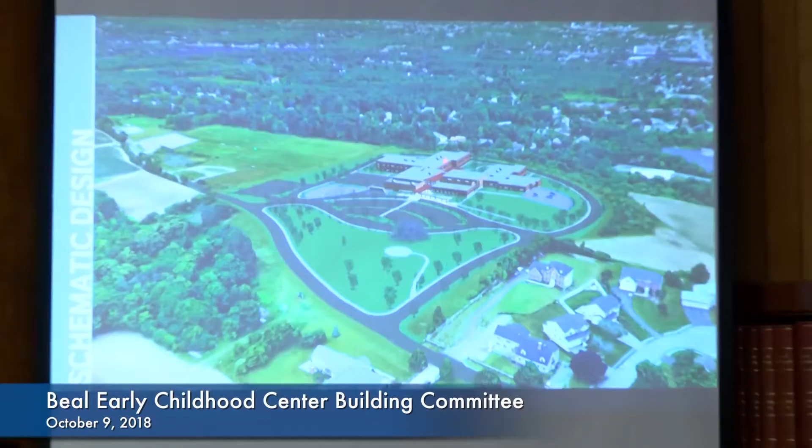This was the bird's-eye view that's been on some of the boards we presented to the town to use in recent events. It's been used for campaigning.

As you recall, the core spaces are located in the front here and the academic wings out either side. The K classrooms are clustered in this area with a playground outside, and then we have the paved play area, another playground area, and the front parking lot.

Just a few other things, in case you forgot: parent pickup comes around the building through the paved play area and back, and buses come in and circulate around the parking lot through this loop and underneath this canopy.

As we mentioned before, we were looking at masonry and a mix of some metal panel cladding. We're still looking at similar materials. We definitely want to stay with classic colors. We're looking closely at earth tones and introductions of some opportunities for brighter colors, but still subtle in nature, so that they'll stand the test of time.

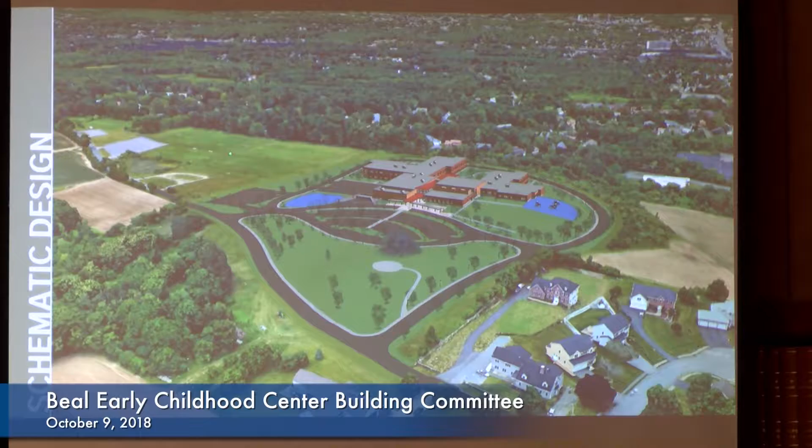So what we did to really give you a good sense is, rather than giving you still images, we actually took this building information model, brought it into a virtual reality environment, and recorded a video clip for you guys to review today. I'm going to try to narrate over it. If you could hold your questions to the end, I can go back and pause part of it if you really want to get into it, but that's what's going to start here.

So for those of you, it's the existing site, and there's going to be a 3D spin around. Here, what we're looking at as far as materials go, you can see the cafeteria in the reddish color, the stair towers clad in a greener color, and then the rest of the building, the academic wings, is masonry. We're looking at different masonry patterns.

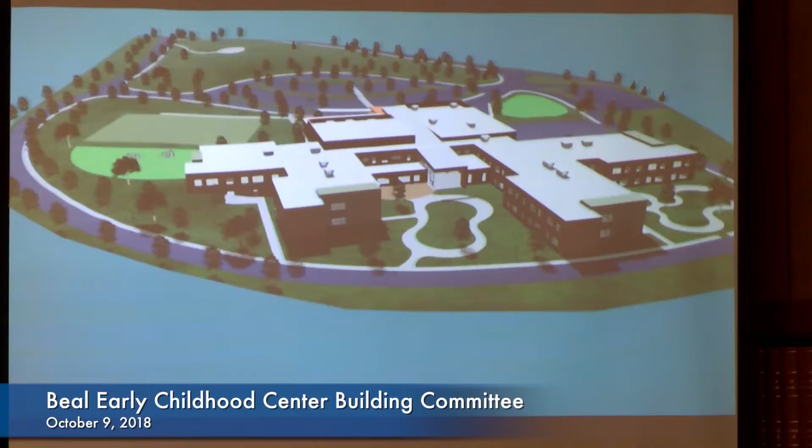We want the elevations to have some life to them. We don't want it to come off as overly institutional. This is a school that is being designed for young children.

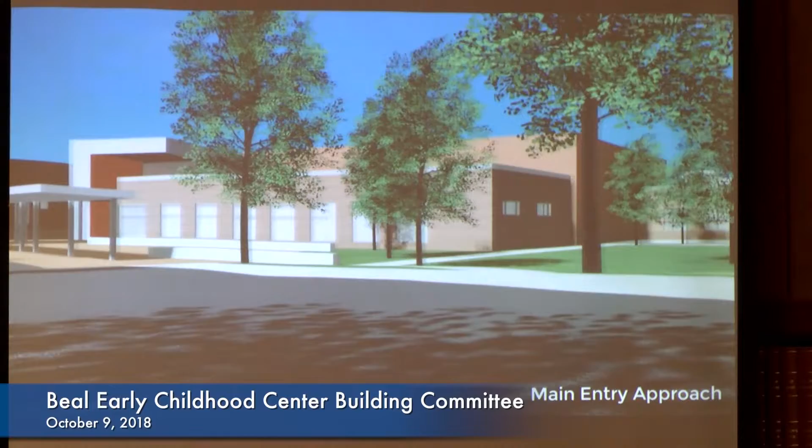This is the approach. You can see the canopies there for the students to get dropped off the bus. The larger lobby element was popping up to draw your attention, but you can see the slate patterning on that K academic wing that was just there to the right.

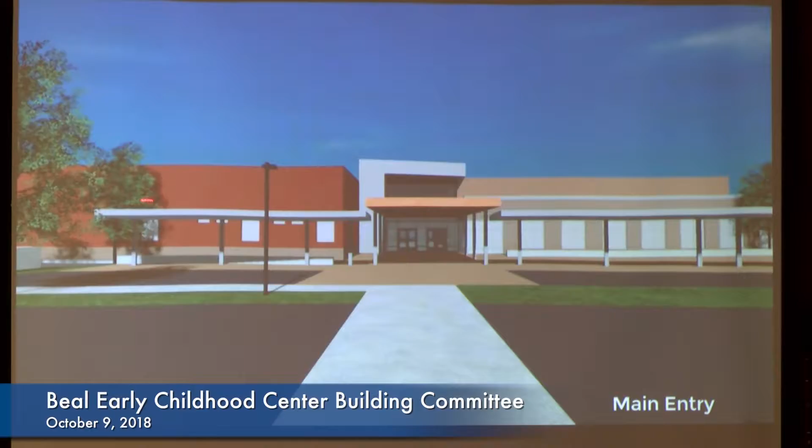Here, looking at the main entry again, you have the administration right here. We have this larger element we've introduced to help draw your attention for wayfinding to the main entrance, and then this is the kitchen end of the cafeteria.

This is the courtyard gardens, where those community garden beds that are already currently at Beal will be housed on the new site. So this is where students will have their own grade-level classroom gardens, with the academic wings kind of embracing them, and the stair tower at the end.

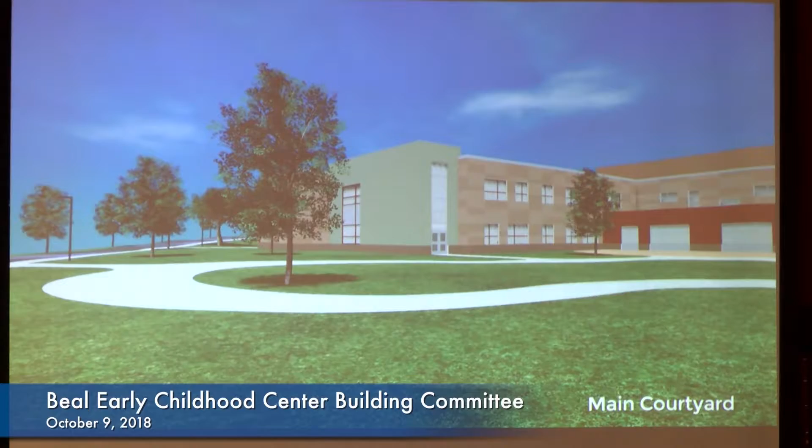This next view is in the main courtyard. The red metal-clad piece on the left is the art rooms. The larger volume is the media center coming through with the main lobby. This is also part of the media center, and then this is the two academic wings on either side embracing this courtyard that looks to the west.

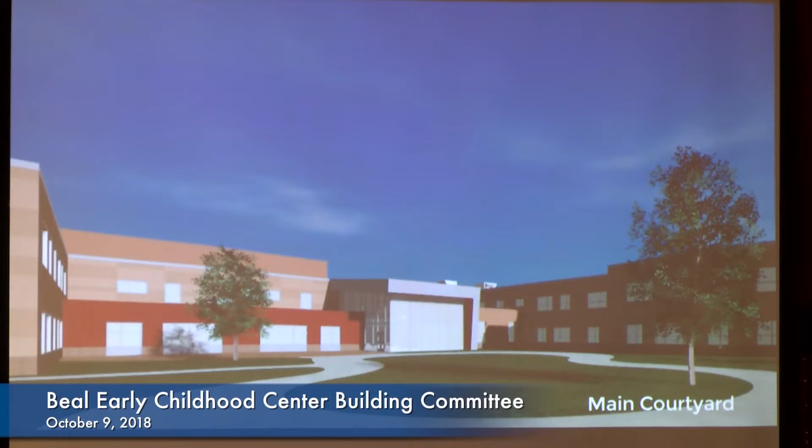As you may recall, that courtyard looking west looks out over Worcester. Here's a kind of time-lapse to give you a sense of how the moon will set and the sun will rise over the site, looking into the courtyard, and how that courtyard becomes filled with sunlight throughout the day. And then here is a view - actually, I'm getting a little ahead of myself, there's the moon.

This is the view looking out the media center towards the courtyard. And here, as you can see, if you can imagine looking out over Lake Quinsigamond, over the Shrewsbury Bridge there towards the Worcester Hills, that's the view you're going to see between these two academic wings. And that's the expanse of glass looking out from the media center.

So Natalie's going to explain a little bit more. As you may have noticed, the main focus was really on this main lobby portion. The academic wings, for all intents and purposes, we looked more closely at the material opportunities of different patterning and colors and earth tones, and introducing that small pop of relief color at the stair towers and these other major core spaces.

So this is going back. Natalie's going to talk about this one here.

So we were just showing what we submitted for schematic design, the main entry view that we had developed. I'm going to go through a few graphics to show more thinking we've done with the building features, and also a little bit in the interior. We're starting to develop the interior. We haven't gotten too far, but we've been looking a lot at the lobby space, entry space, and the core areas.

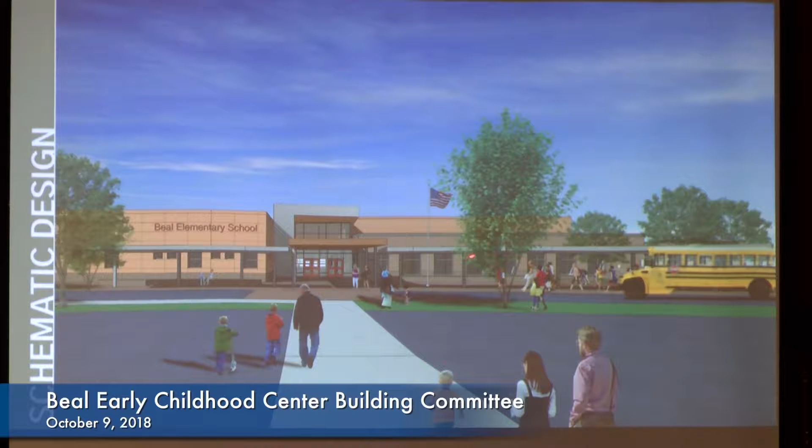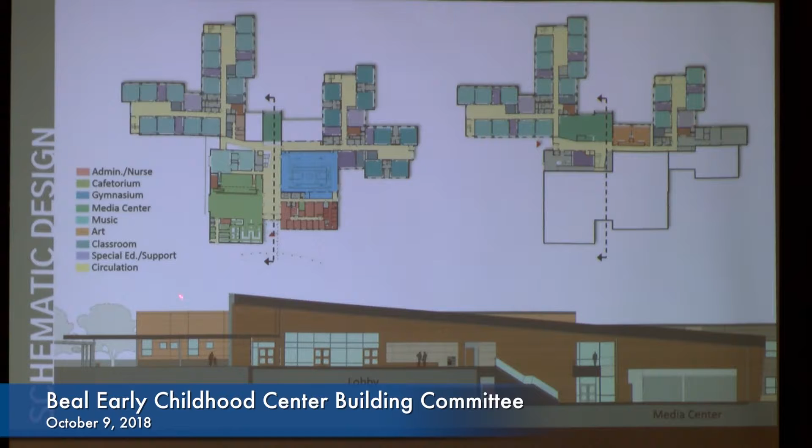Getting into the interior a little bit, we cut a couple of views to show what it would look like slicing through the building, looking toward the cafetorium there in green, and what it would look like in the main lobby space here.

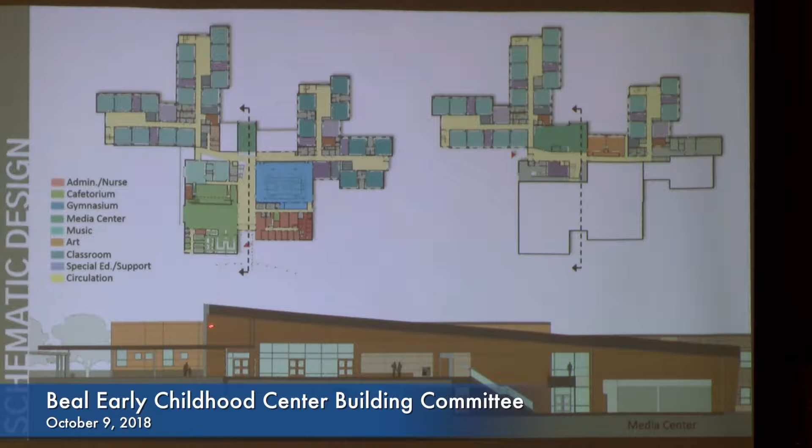You can see this sloped roof is a main design feature, starting at the main entrance with the accent wall and then going through the building over the media center at the back, really connecting all of the core spaces from that main lobby visually and physically, with all of those core spaces readily accessible and visible.

You can also see the main canopy extending out on this roof over the glass, creating an interior-exterior connection. There's a main stair that creates a good visual connection to the lower lobby and the media center on the ground level, making it feel really connected to the main level even though it's on the ground level.

It has this double height glass, and you can also see beyond it, this entrance from the recess area on the south side. That's where the parent pick up and drop off will also be, on that south side, so it's all going to be very visually connected. That's the cafetorium here, looking south.

Then looking the other direction, because this is where we've put a lot of thought so far in this phase, just looking at the same kind of idea, slicing through the building. Looking toward the gym, that's the gym in blue, and the administration suite and nurse in the red tone.

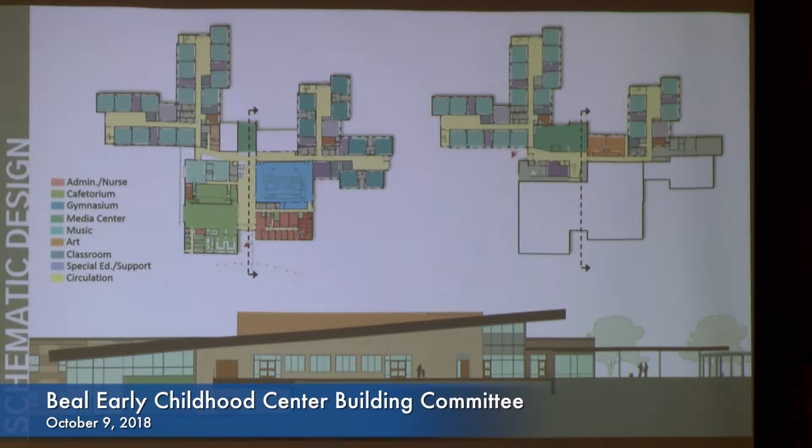You also have this nice visual connection down to the media center, with another feature being a lot of glass down here, a glass wall. The art room block is here, which could be another feature, an accent wall exposed in the media center. Then you'd have a direct connection out to the courtyard behind the art rooms, and also a direct connection out to that really nice green space behind the media center.

So we're really emphasizing that indoor-outdoor connection as well as connection with all the core spaces together. So that's been what we've been developing so far. And again, the color palette, we're just doing a lot of color studies at this point. So that's still early, but those are the main ideas.

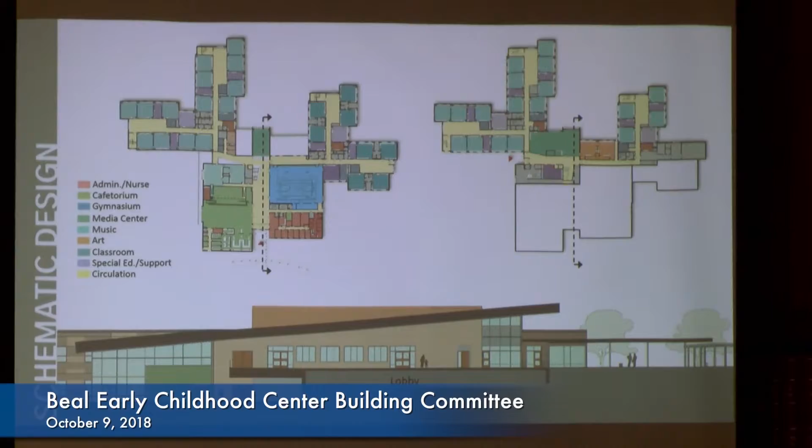Bob, what have we learned at Sherwood that we liked, that we want to bring forward, or that we might want to avoid? The thing I wanted to ask is, you're using some brick, some metal panel. I understand some of the metal panel systems cost almost as much as the brick. And why wouldn't we use more brick than metal panel? Metal panel has more maintenance, you have caulking issues, dents, all that kind of thing. So the use of more brick would make sense, because I think the cost is similar.

Correct. As far as the limits we're looking at right now, we're probably 60, maybe 70% masonry, to give you a sense of the exterior cladding. So we are conscious of this, and we are trying to use metal conservatively and sparingly. In areas of greater importance, drawing people's attention, we've looked at introducing the metal. So we are aware of this, and we feel similarly about it. We can continue to look at other options to introduce masonry should we come up against budget constraints.

But both at Sherwood and the high school, we've got some dents. We're experiencing areas that we have to recaulk. And if it gets damaged, you can never really match the colors. So that's a concern.

If we're so fortunate as to get the two votes we need to move forward, I would appreciate that as we get into the real costing phase, that we have the estimated cost of the option that was carried through this process, and then of any other options as add alternates.

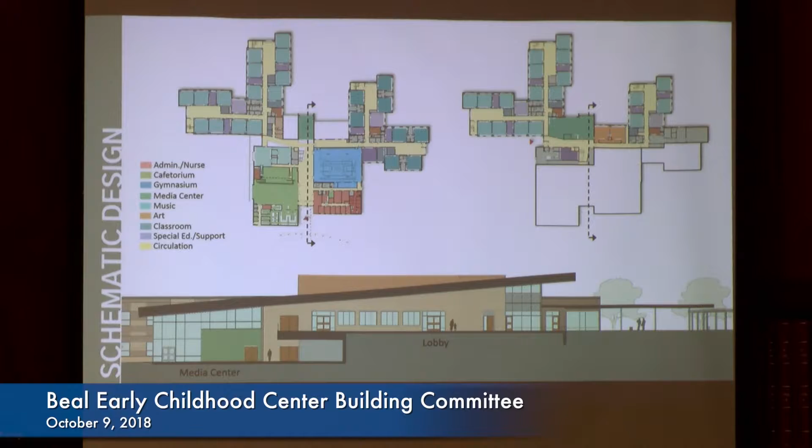Okay, we'll come back into session now at 6:26. Paul has arrived. Good evening, Paul, how are you? I'm well, thank you. I apologize for inconveniencing the committee.

No problem. We'll now go to 4A and hear our report from the owner's project manager regarding schedule of financials and other related matters.

Since the committee last met 2 weeks ago, we had ongoing discussions with the Massachusetts School Building Authority. We submitted a project budget based on costs we anticipated and estimated, but we weren't sure how the MSBA would deem various things eligible or ineligible. We made the best estimate we could, and through their review, they deemed some items we thought would be eligible as ineligible, but other items we thought would be ineligible, they deemed eligible. So we ended up with a net gain in the calculated MSBA grant.